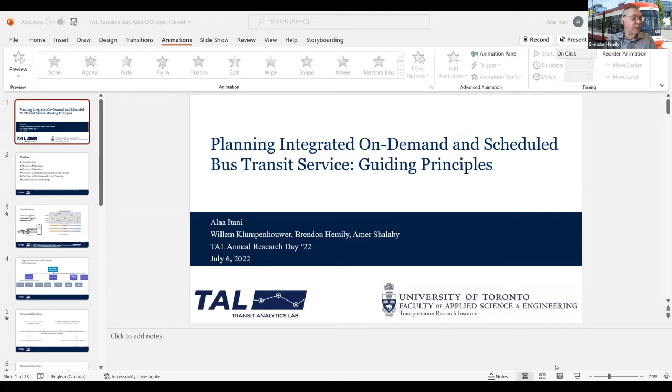And then we'll try to have a little time for questions after each, and start with that. Our first presenter, I'm gonna read them to get the titles exactly right. Alaa Itani is a PhD candidate in the Department of Civil and Mineral Engineering at the University of Toronto. In her PhD thesis, Alaa is developing guidelines and analytical tools to support on-demand transit planning, ODT planning. So Alaa, take it away.

Thank you, Brendon, for the introduction. Hello, everyone. Good morning. Happy to be presenting today as part of our Research Day. I will talk a bit more about the guiding principles that we've been trying to form the last year based on some synthesis from the research and practice.

Today's presentation is going to be a short presentation with some of our research motivation and objective behind constructing these guiding principles and how we did guiding principles for 2 different use cases. The first use case is at the transit network design, and then the second use case at the service planning level. And I will conclude with some of the limitations and future steps.

So really to begin with, maybe a lot of you already heard of what's on-demand transit. It's a flexible form of transit that can be served in different types of vehicles, but it also requires some sort of supporting technology to address the traveler's requests of drop-offs and pickups. And I like this definition from Volinski, that it's really the chameleon of the public transportation world because it's not one thing. Actually, on-demand transit comes with different forms. It can change its form in the middle of its cycle, and that's how flexible it is.

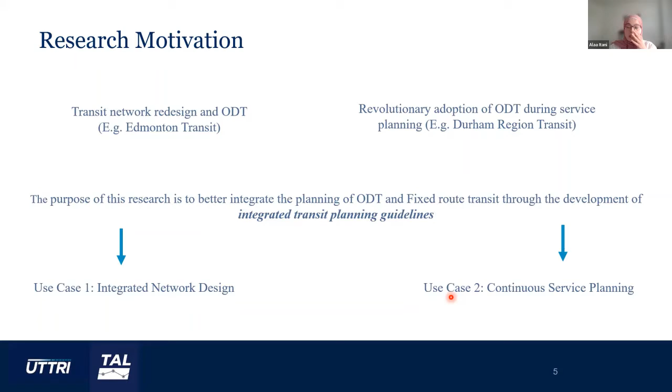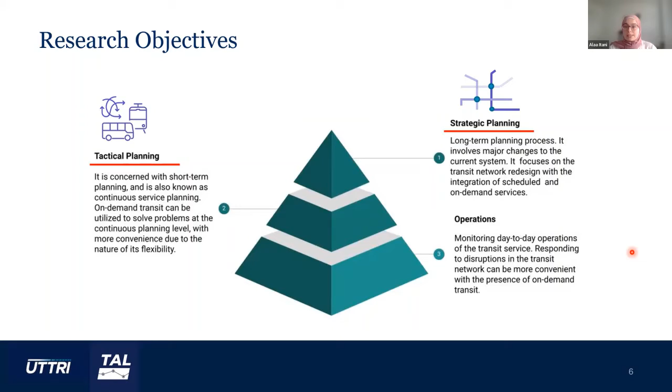So as I mentioned, we focus at the higher level, strategic planning level, the long-term level, and then we go into the tactical planning, which is the short-term planning process. And operations is out of scope of these guidelines. So just to begin with, to give you an overview of our first use case, we consider the conventional, if you want to say, transit network design flowchart, or planning that's usually done.

But we try at each of these steps to incorporate on-demand transit, like what are the new goals and objectives in an integrated network versus a fixed route or conventional network. What are the adequate performance metrics and criteria? What are the different system requirements, and how can we better help address equity with integrated networks?

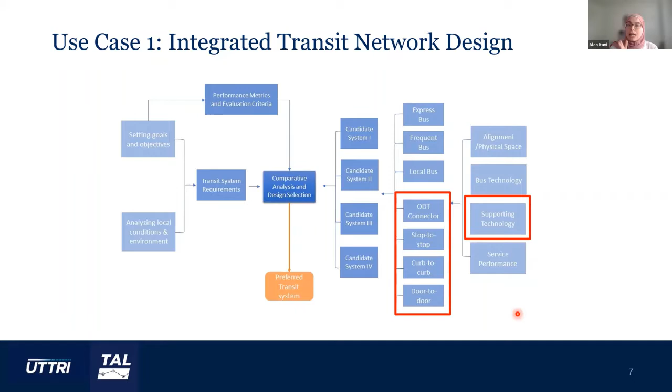And again, as I mentioned before, we introduce a new set of service configurations into the network, and we talk a bit about the supporting technology needed for on-demand transit. As part of our first use case, we try to introduce new opportunities for integration.

What we felt was most common in practice and research is the connection between on-demand transit and fixed route transit, where on-demand transit usually plays the role of first mile, last mile connection. But we try to highlight additional opportunities for integration.

The first one is service integration, which not only entails on-demand transit being the first mile, last mile connection, but also the ability in an integrated network to switch between on-demand and fixed route transit along the same corridor.

The second opportunity of integration we highlighted is fare integration, having free transfers between on-demand and fixed route transit and having the same payment method.

Secondly, trip planning integration, having people plan for their trips, knowing and connecting between fixed route and on-demand transit. And finally, financial integration, because in integrated networks it's really important to have cross-subsidies between less profitable and more profitable services. That could be done by having joint financial assessments rather than just assessing each individually.

Moving to our second use case, which is at the service planning level, here we focus on service-specific guidelines for on-demand transit. We start with what are the different service goals that on-demand transit achieves at the service level.

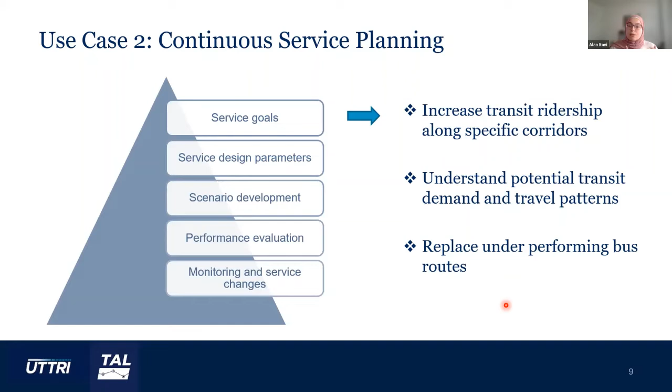So this is just a glimpse of a scenario development case where, let's say, a transit agency has potential to implement three different types of on-demand transit: the first mile, last mile connection, stop-to-stop configuration, or door-to-door configuration.

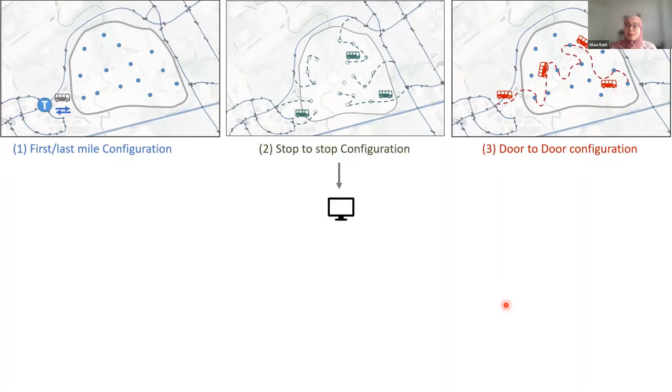There's really a need to have some analytical tools to be able to better assess which scenario best suits the goals of the company. That would be by measuring from the operator perspective, customer perspective, cost, time, but also, like we mentioned, performance evaluation measures.

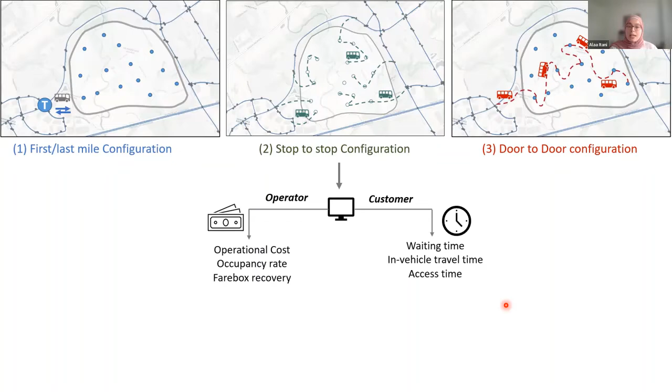Measures that also go beyond cost and time, like vehicle kilometers traveled, mode shift to transit, and increase in transit ridership. And equity, as I mentioned before, equity is very important with on-demand transit. It has been shown that it can fill gaps in transit networks, so having some equity analysis is important.

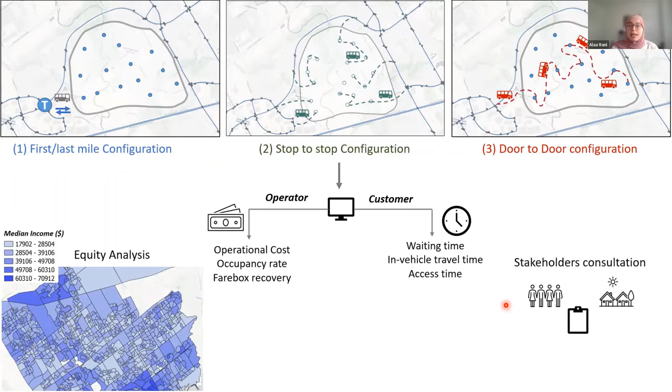And finally, the stakeholder consultation before the transit agency can really decide on what's the best plan in this specific service area for our goals that we need to achieve.

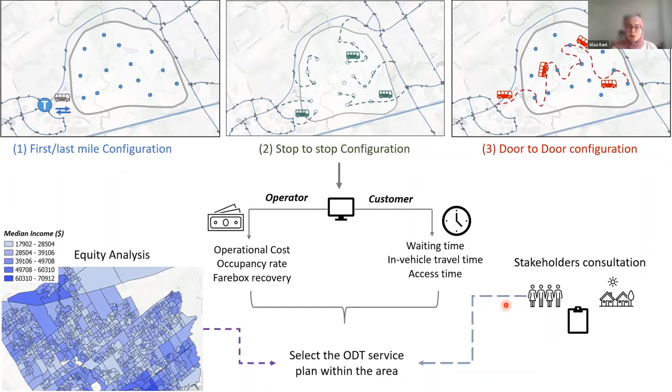So really to conclude here, these guiding principles really provide transit agencies with a lot of guidance on the opportunities of where to implement on-demand transit, the where, the when, under what conditions, and how.

They also help planners really formulate candidate plans of different on-demand transit services and highlight different opportunities for integration between on-demand and fixed-route transit. They provide guidance on the ways to evaluate those, where there are different competing plans. And finally, we discuss the associated issues of monitoring, data requirements, and service changes.

So the limitation of this work is that I mentioned simulation tools and their importance to evaluate on-demand transit services, but we do not cover which simulation tool is better or which to use. This is part of one of our future steps, to do a study on different simulations and their capabilities to model on-demand and fixed-route transit at the same time.

The second limitation here is that these guidelines do not focus on integrating on-demand transit with paratransit services or services for accessibility.

And finally, I mentioned equity, and we noticed that there is kind of a gap in the research with having adequate tools to measure accessibility, including on-demand transit. This is not part of our research, but it's an interesting research gap.

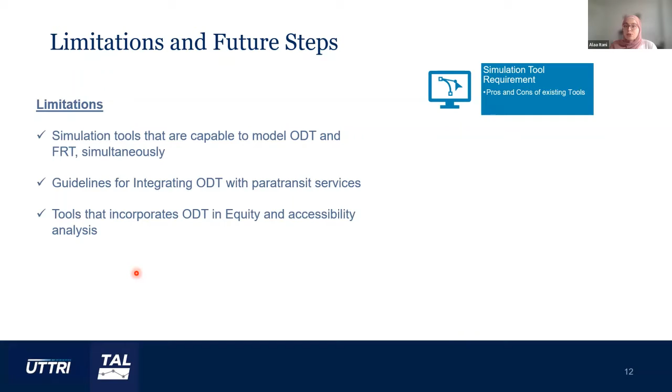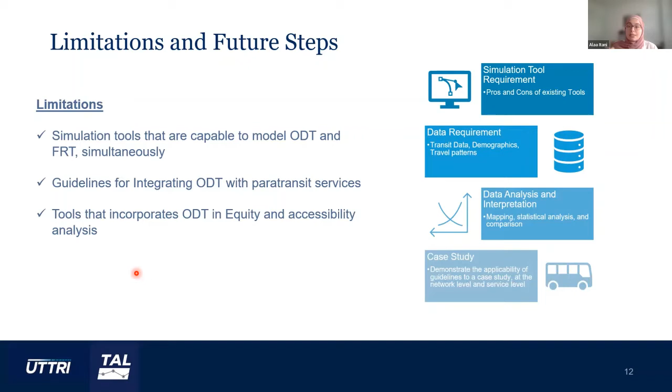And finally, our future steps, as I mentioned, are really to study the pros and cons of existing tools, collect data, and have some study on travel demand, patterns, demographics, existing transit networks, having a data analysis using some mapping, and finally demonstrate the applicability of these guiding principles in a real case study at the network level and at the service specific level.

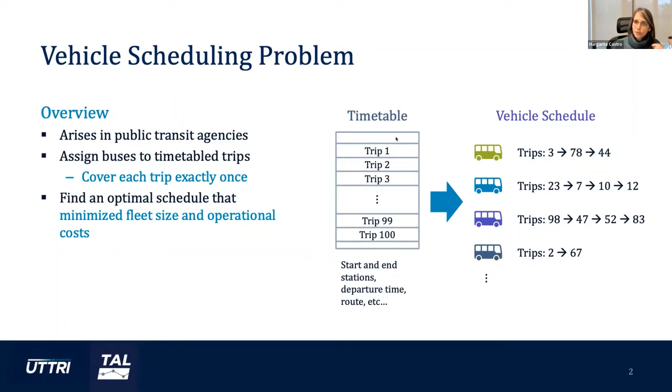So as before, the main goal is to assign each trip to exactly one bus. But the difficulty here is that now the bus has to start and end at the same depot, and this little change makes the problem exponentially harder to solve. And we also have to minimize the costs that basically are the travel times.

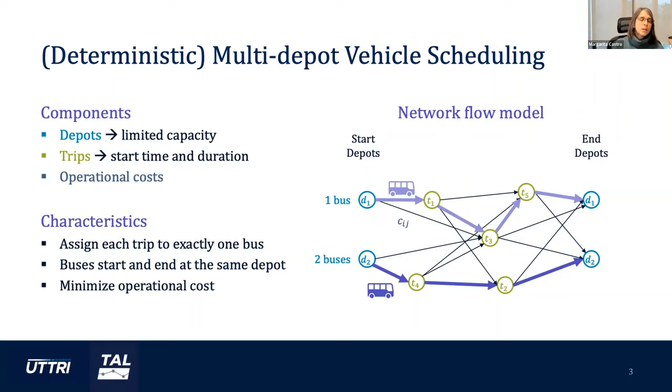So here I'm just talking about what we call the deterministic version that has a lot of limitations. Because when we talk about deterministic versions, we're usually talking about solving, considering the times as deterministic. So for instance, we can use average times to solve this problem, which would be optimal for these average times, but they are very inflexible. They don't consider the delays in practice. So we can have a lot of delays, and the schedule is not going to be that useful for the transit agency.

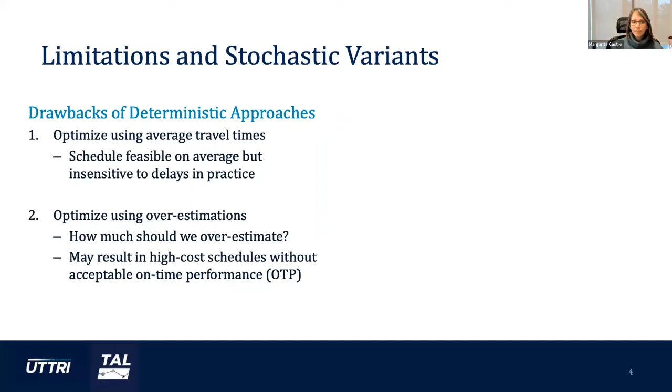Another thing that we can do, and this is actually very common in practice, is to optimize over estimation. So you consider not the average time, but you consider that there might be some delays. But the problem here is how much should we overestimate, and what happens in practice is that we tend to overestimate more than we should, and we end with high-cost schedules, but not necessarily with a very good on-time performance, because there's a lot of sensitivity going here.

So there have been some studies in the literature on how to incorporate the stochasticity, especially of the traveling times, to this type of problems. So for instance, you can consider the penalty on the expected delays, but this type of work usually doesn't consider the propagation of delay, that if one trip took longer, probably the next one is also going to take longer because of this propagation.

Also, there are some works that try to do some rescheduling or real-time vehicle scheduling, so they try to change the schedule during the operation, but these adjustments might be very infeasible in practice. They require a lot of coordination, so they're not very suitable for practical applications.

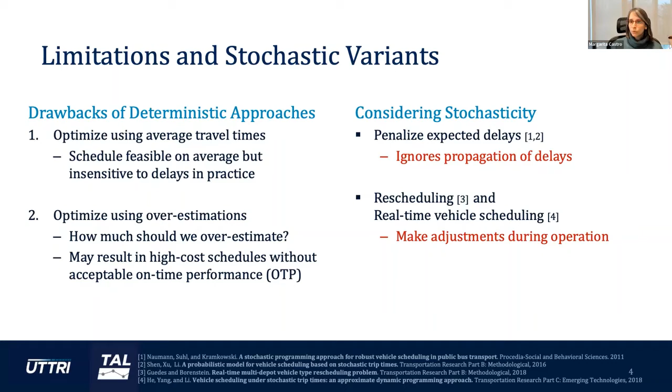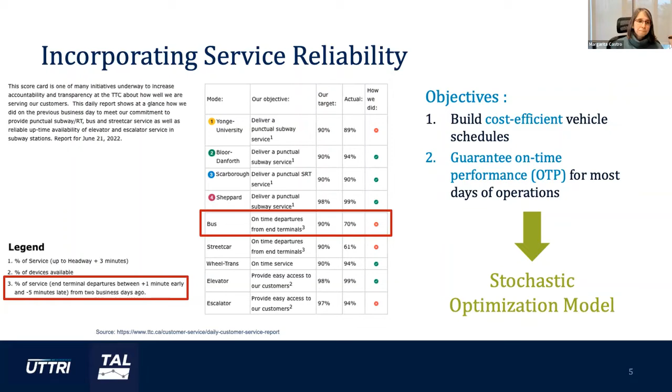So our main focus, with this in mind, was to build cost-efficient vehicle schedules, but also guarantee this on-time performance as defined here for most of the days of the operation. And to achieve this, we develop a stochastic optimization model. So the main key features of our model are the following.

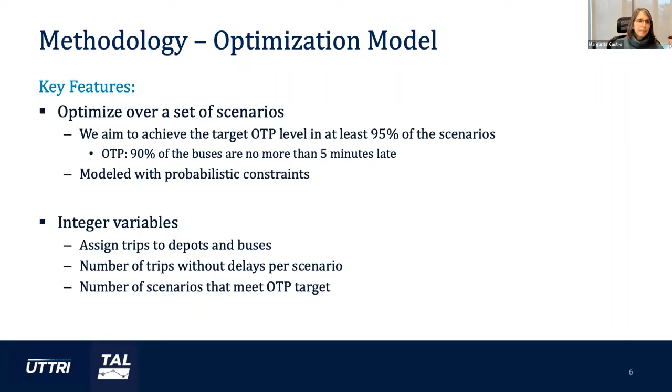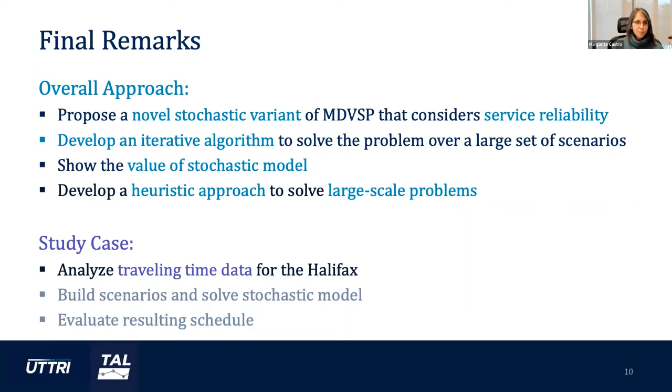So if you have any questions, I will be happy to answer. Thank you, Margarita. There actually is a question there from Eric. How do you translate deadhead travel times from HERE, measuring general traffic, to a bus travel time? Do you include variability in those deadhead times?

Okay, yeah, good question. Actually, this was very tricky because, of course, the data from HERE is mostly generic traffic, and it's not bus specific. So what we had to do is, if I recall, we added a little bit of variability there, but basically we used the HERE data as average time, and then we added a little bit more or less. I don't recall exactly, but we had to do a little bit of adjustment to make it more realistic. Yeah, that's true. But not too much.

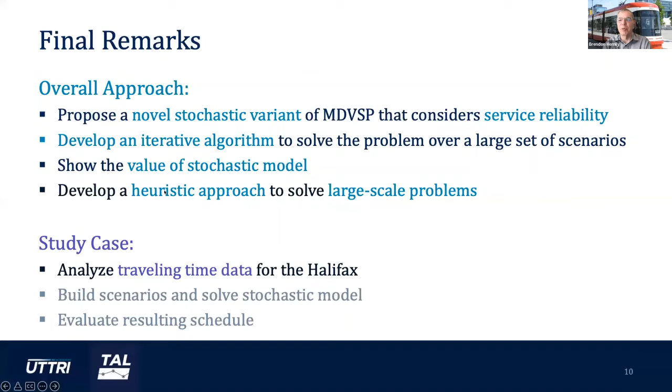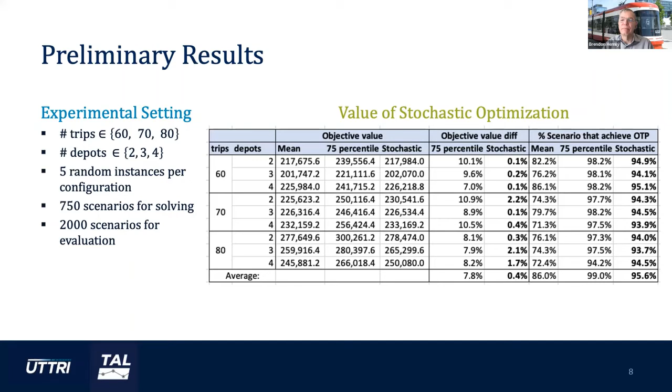Objective, the results, the objective value, basically the cost. But in practice, for this experiment, yes, the more depots that you have, the more variables that you have to incorporate to your model, so it takes much more time. In these particular problems, what we were seeing is that increasing the number of trips actually makes the problem much more challenging. I think we can reach up to 100 trips, but then it starts taking several hours to solve.

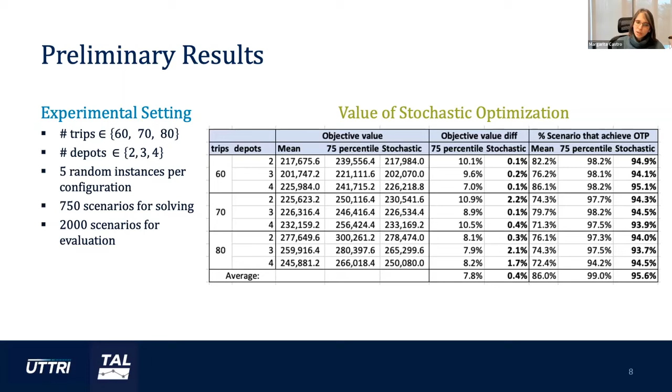The number of depots, since they're still very small, because in practice you never have more than, I don't know, 5 depots, it wasn't that much of a problem, but it's true. The more depots that you have, the harder it is to solve the problem. But still, for these ones we were able to find optimal solutions in 2 hours, so it was quite reasonable.

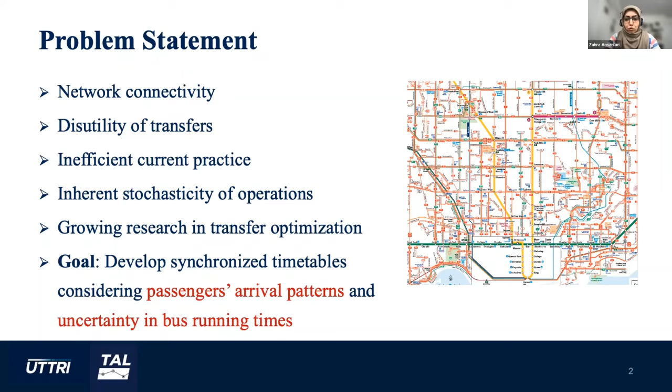A growing number of studies are tackling transfer synchronization, but mostly in a deterministic setting. And the few that consider the stochastic nature of transit systems are not including enough details in their model formulation. So to address this shortcoming, we are trying to develop synchronized timetables while considering the passenger arrival patterns, which I will explain shortly, plus the uncertainty in running times.

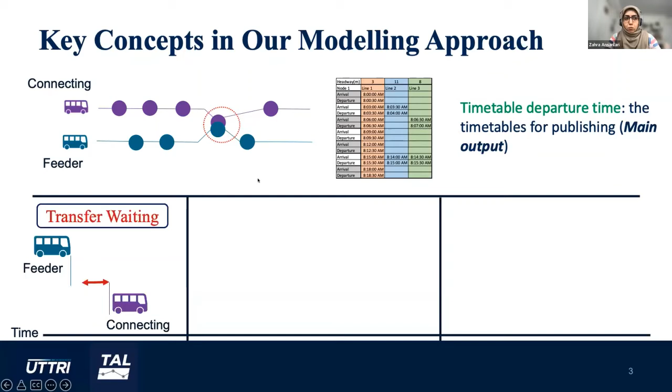So consider a transfer node, and we have one feeder line and one connecting line. The goal here is to develop a timetable for a departure time that we are going to publish for passengers. And we have 3 main objectives in our model. The first one is the transfer waiting time, which is the time that passengers from the feeder arrive at their bus stop and then wait until their connecting bus arrives.

But as I mentioned, we are considering the stochasticity of the running time. So the arrival time of the buses would not be similar across the different possible running times that would occur in the real world. So if the bus arrives early, and after its dwell time for boarding and alighting it has to wait until the timetable departure, we are adding some unnecessary in-vehicle time to passengers and also extra costs to this bus.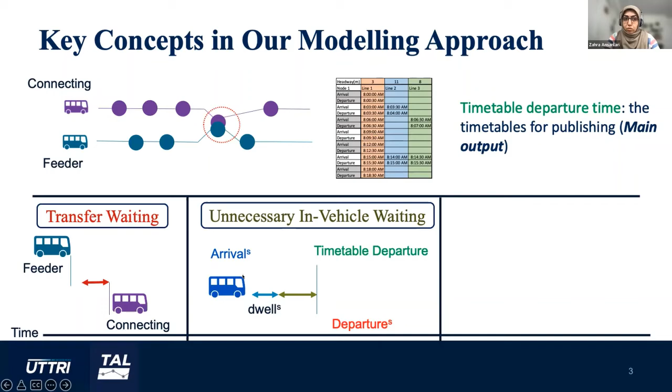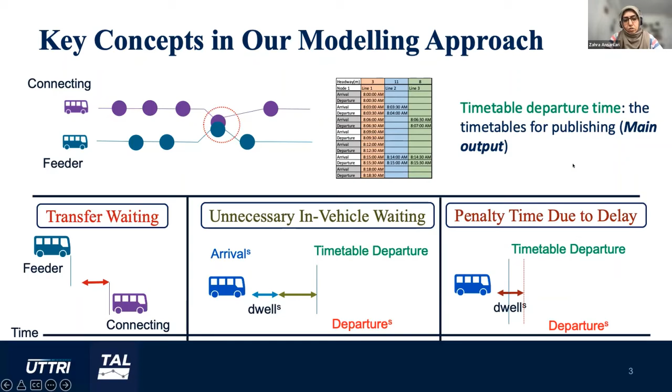Another scenario would be that the bus actually arrives very late. So after giving some time for the dwell time, it's going to depart later than the timetable departure time it's supposed to, which is the penalty time, and again, we are adding some extra time to the passengers. So the whole idea is to minimize these 3 types of waiting time in our system while considering the stochasticity.

So we have 2 main types of boarding passengers. One of them is the transferring passengers, for whom, based on the arrival of their feeder vehicle and the connecting vehicle, we will have the waiting time. However, for the local passengers, it's better to consider low frequency and high frequency lines differently, because in high frequency lines, the common assumption in the literature is that passengers will just arrive randomly. So the number of local passengers that we will have in our system.

I forgot to mention that we are determining the exact dwell time for our buses to make sure that we also have the correct departure time. So in order to determine that dwell time, we need to know the number of passengers and also their relative arrival time to the bus.

So in high frequency, the local passengers are coming. We define two zones to correctly model this dwell time and the arrival time for the high frequency. So in zone 1, if the bus arrives before its timetable departure time, we will have the local passengers, which is the number of passengers who arrived during the interval between the previous bus departure time and the arrival time of our bus.

And then we will have some transferring passengers. We determine their dwell time and see whether we have any unnecessary in-vehicle time, or whether their required dwell time passes our departure time, and we consider the penalty.

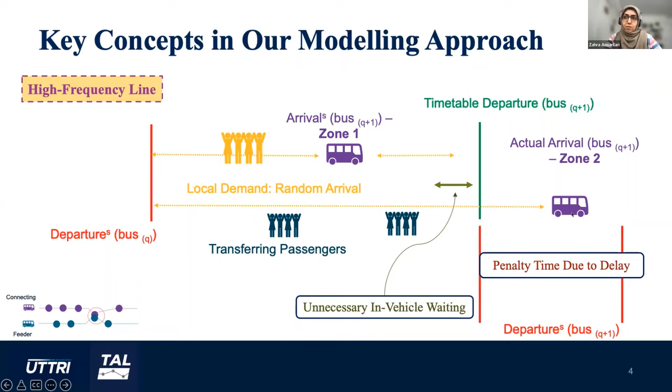The second case is that the bus arrived very late after its timetable departure time. So now we have more local passengers. We determine that value correctly, and then we will also have some transferring passengers. Again, we determine the dwell time and the departure time of this vehicle. In this case, for sure, we have some penalty.

But the model gets more complex when we are talking about the low frequency line, because the common assumption is that passengers tend to check timetables when their bus is low frequency and try to minimize their waiting time accordingly. So we will have a skewed distribution for passenger arrival, and we assume that based on some data, we can find the time that the higher proportion of passengers arrive, for example, this time point.

And there is also a smaller group of passengers who tend to come close to the timetable departure time. So in order to consider all of these arrival patterns and the correct dwell time, we define 4 zones for low frequency. The first zone is that our bus arrived very early compared to the timetable departure time, which means we will not have any local passengers, but it's possible that we have some transferring passengers.

The second zone is that the bus arrived at this time interval where we have our first local passengers, so we consider their dwell time plus any possible transferring passengers who arrive during this time. And the third zone is when the bus arrives very close to the timetable departure time, where it's possible that we will experience some penalty time if we have a lot of local passengers and also transferring passengers.

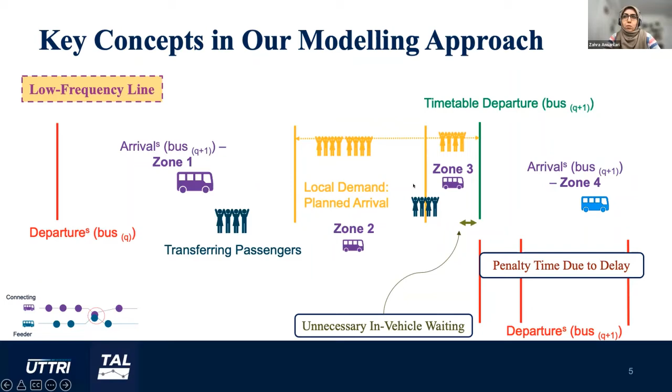And the fourth case is that the bus arrived later than its timetable departure. So we will definitely have some penalty time. So on the whole, we are trying to minimize all these possible waiting times that would happen in our system.

In order to formulate this super complex model, we formulate the model through 2-stage stochastic mixed integer programming. The first stage is the timetable departure times, which are going to be fixed. So we are fixing that timetable. We are going to publish that timetable.

But the second stage is the possible arrival and departure times that would happen in our system, which we define as scenario-based. So based on the distribution that we have for our running times, both feeder and connecting vehicles, we create some scenarios, and the arrival and departure times of those scenarios are the second stage decision. For example, whether the bus has to wait until its published departure time, whether the bus is departing late or on time.

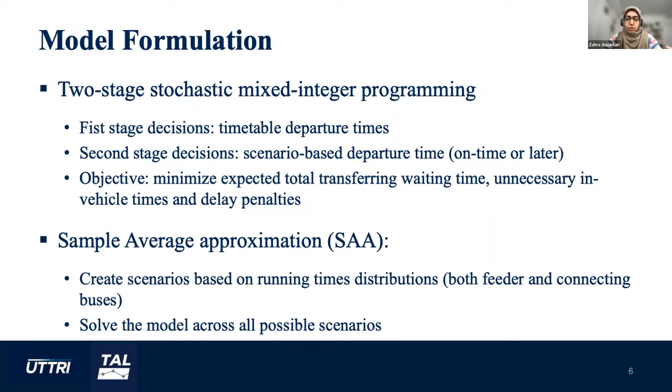And then the objective is to minimize the expected total transfer waiting time, unnecessary in-vehicle time, and the delay penalties across all the possible scenarios. So we are solving our stochastic model through the sample average approximation method, meaning that we create those scenarios based on the running time distribution, and then we solve the model in a way that we develop a timetable that, when applied in those scenarios, gives the minimum expected value.

So we run our model for one transfer node, which has both a high and a low frequency line. The high frequency is about 3 minutes headway, and the low frequency is 17 minutes. And we run that model for 10 scenarios.

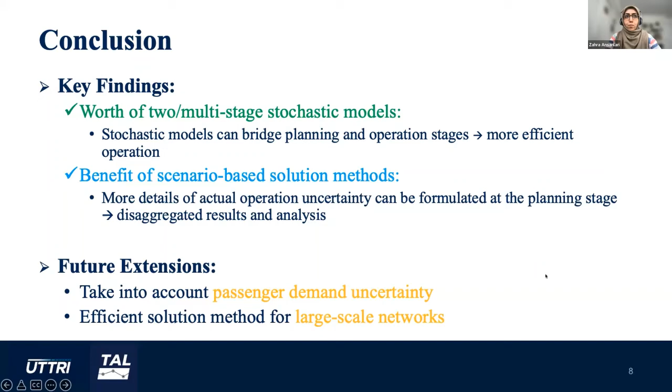Thank you, Zahra. That was very interesting.

You talked about complexity. The test for your simulation was one transfer point, correct? So what happens in a grid where there's multiplicity — is it scalable, or what happens? There are a couple of approaches we can use to create a solution method to solve a stochastic model that we are currently working on. The idea is that you break down the whole model to each transfer node, solve them separately, which is faster, and then merge them together to get the final solution. It's doable, but it needs some research to do that. And probably pretty powerful computers.

Could you clarify the 10 scenarios — are there variations in the arrival times of the different vehicles or buses? The variation here is that the running times between each terminal and the transfer node — we only have one transfer node, but we create different scenarios based on different running times for both the feeder and the connecting vehicle. When we run those models for different scenarios, the arrival and departure times would be different in each scenario because of the running time. For example, all buses will depart from the terminal at the same time, but because of different running times, their arrival time at the next node is different. Then we see whether it can actually depart on time or will depart later, and we see stochasticity in arrival and departure time in the following nodes.

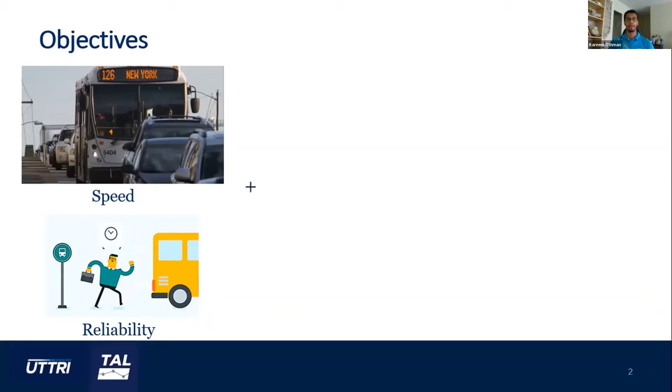Most transit studies focus on improving transit speed or reliability. In this research, we focus on these two aspects, improving transit speed and improving reliability. In addition, we are trying to minimize bus energy consumption, and also improve passenger comfort. So it's a combination of objectives: we are trying to achieve improvement in speed, reliability, energy consumption, and level of comfort.

Traditionally, if you want to really improve or prioritize transit, this happens at the cost of traffic. You implement exclusive bus lanes or TSP, improving transit at the cost of delaying or deteriorating traffic performance. In this research, we are trying to prioritize transit, but at the same time looking at traffic, trying to mitigate the impact of this prioritization on general traffic.

In this research, we will be talking about three main strategies: dynamic bus lanes, speed advisory systems, and some advanced TSP. For the aim of this presentation, I will focus on dynamic bus lanes and speed advisory systems only. I will start by investigating every strategy individually, then I will combine these different strategies at the end of the presentation.

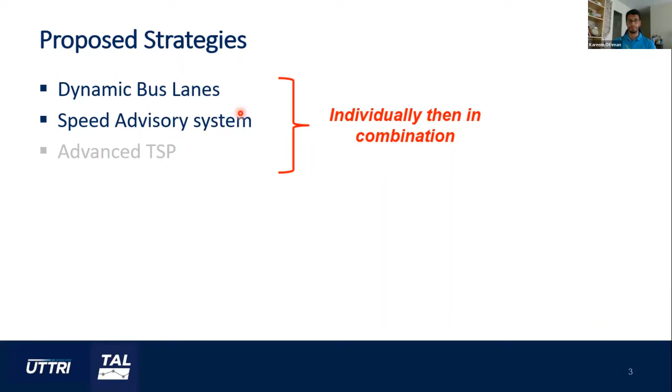So let's start with the first strategy: dynamic bus lanes. These are lanes that are accessible to cars when a bus is not present. We have a bus here, and a clear distance ahead of the bus. In this clear distance, general traffic is not allowed to enter the lane. But ahead of this clear distance, and behind the bus, general traffic is allowed to enter the lane. So it's giving priority to transit within a specific distance, called the clear distance.

This is mainly based on connected vehicles. We need some sort of communication between the bus and general traffic to inform traffic not to use this lane. It's very similar to emergency vehicles such as ambulances. In this case, we'll have a win-win situation: a lane that gives priority to transit, and at the same time, once we don't have a bus in the lane, general traffic will be allowed to use it. We are prioritizing transit while allowing general traffic to use this lane when no bus is running.

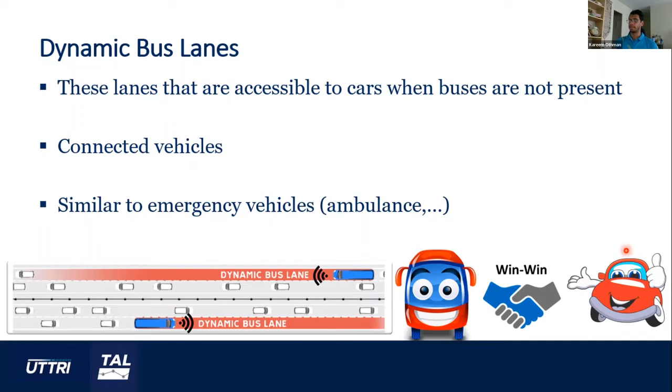In order to test these dynamic bus lanes, we've seen that the TTC in 2019 approved their 5-year plan, giving priority to 5 main corridors. They implemented exclusive bus lanes in Eglinton East, which is now running with exclusive bus lanes. So we decided to build a simulation model for Eglinton East to compare the performance of exclusive bus lanes with dynamic bus lanes, and with the case of doing nothing.

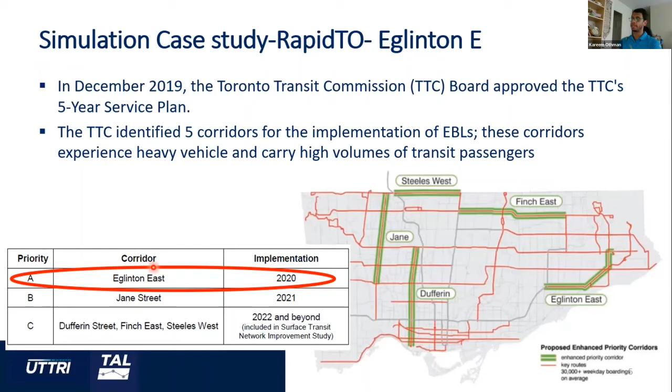As I mentioned, dynamic bus lanes aren't only going to affect transit—they affect transit and traffic. So the main focus here is on total person travel time, not just for transit. For every scenario—exclusive bus lanes, no priority, and dynamic bus lanes—we tested every strategy under different demand levels and different frequency levels.

We have 2 figures here. Figure A compares the total person travel time for exclusive bus lanes versus no priority. Figure B compares dynamic bus lanes versus no priority. On the x-axis we have total traffic input flow, and on the y-axis we have bus frequency. The red color means our strategy—exclusive or dynamic bus lanes—is deteriorating total person travel time, while blue shows the strategy is improving total person travel time.

For exclusive bus lanes compared to the case of no priority, we see an area here under heavy traffic demand and high transit frequency.

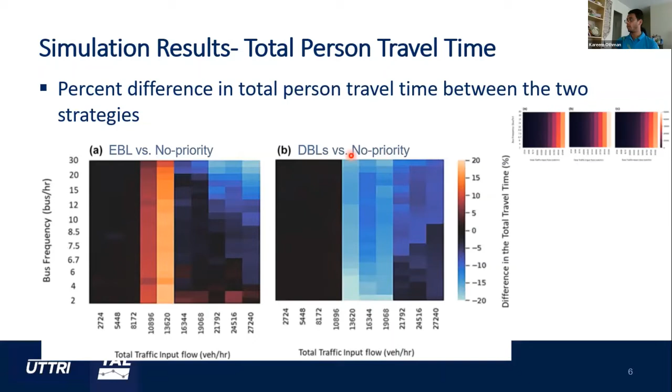We have an area here where exclusive bus lanes are actually a good option, improving or reducing the total person travel time. And the same figure is shown for dynamic bus lanes for the case of no priority, but we can see there is a big area here where actually dynamic bus lanes are beneficial.

Based on this comparison, we have reached this final figure that shows the optimum strategy under every condition. At low traffic demand, we don't really need to give any priority to transit. At high traffic demand with low transit frequency, we don't really need to give any priority either. We have a large area where dynamic bus lanes will be an optimum strategy that achieves the minimum total person travel time. And the exclusive bus lane is the optimum scenario for high traffic demand and high transit frequency.

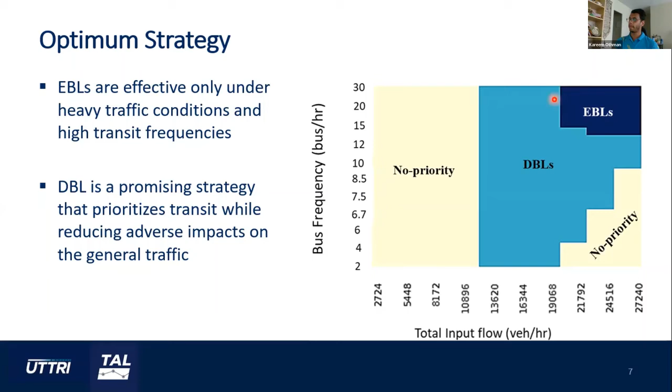Now I'll switch to the second strategy, which is the speed advisory system. The main objective of the speed advisory system is to allow the bus to arrive at the intersection while the signal is green. So what happens is that we have a signal.

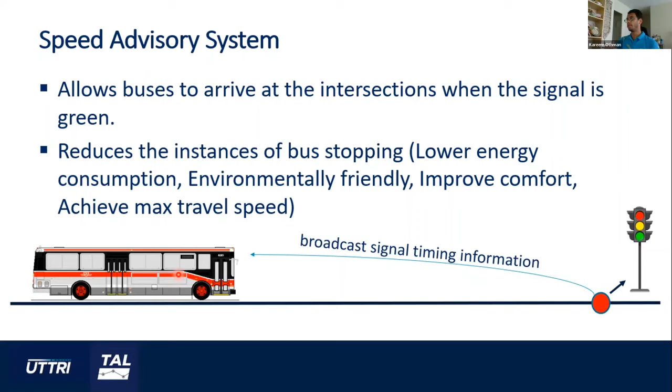This signal will be sending the bus the signal timing information, so the bus will be aware of what's happening in the signal ahead, and will be adjusting the bus's speed in a way that allows it to pass the intersection without stopping, at the green phase.

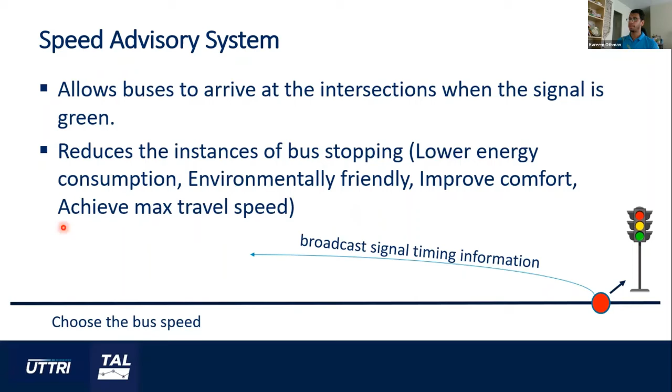So why are we doing this, or what are the benefits of this speed advisory system? It actually reduces the number of stops, which in turn reduces energy consumption, improves the level of comfort, and at the same time achieves the maximum travel speed, as I will show in the next time-space diagram.

This diagram shows how the speed advisory system works. If we have two segments, at the beginning of segment 1 we do the calculation given the signal timing information at signal 1. We have the maximum speed and the minimum speed. We iterate from the maximum speed, and keep iterating until we reach a specific speed that allows the bus to arrive at the green phase.

But in the case of no priority or no speed advisory, the driver will be traveling at a random speed, arriving at a random time, and might stop at the red phase. So here, if you give some advisory to the driver, you let him drive at the maximum speed to arrive at the green phase.

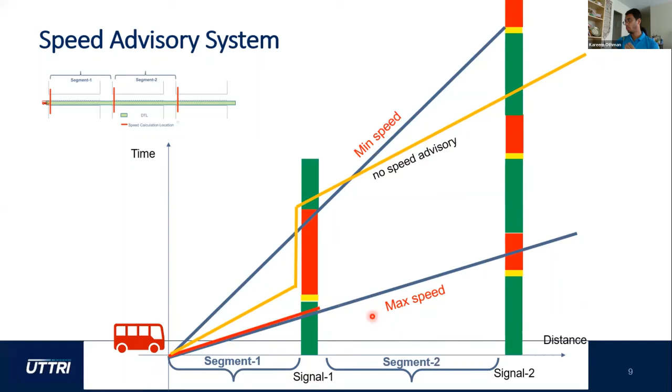For segment 2, we do the same calculations, but the maximum speed is actually hitting the red phase, so we keep iterating until we reach the speed that allows the bus to arrive at the green phase. This is going to be the speed advised to the bus driver, and this way we are avoiding the stop at the intersection.

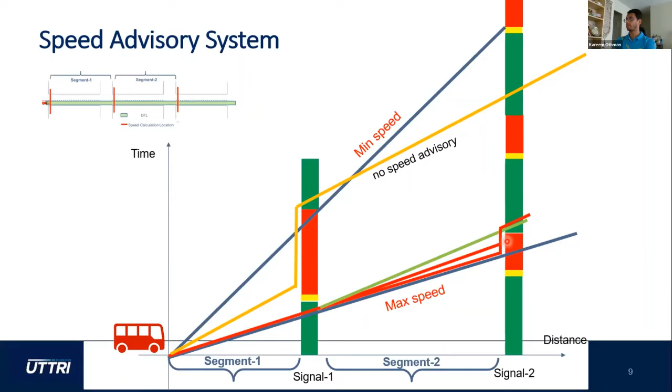So what happens if we have a dwell time? In the previous case, I didn't show any bus stop. In this slide, I'll show how the calculation works once we have a bus stop, so it's going to be not only speed advisory, but speed plus dwell time advisory.

In this case, we have the maximum speed and the minimum speed. For the maximum speed, if we choose it, the bus will be dwelling for a specific time, then traveling again, but in this case the bus will be forced to stop at the intersection. And if we choose the minimum speed, the bus will also be forced to stop at the intersection.

So any speed between the maximum and the minimum speed will end up with a bus that has to stop at the intersection. So here we don't just give a speed advisory, but also a dwell time advisory. We advise the driver to dwell for additional time, to allow the bus to arrive at the intersection or signal at the green phase.

So we have two terms here: we have the standard dwell time.

This is the dwell time needed for boarding and alighting, and we are advising the driver to dwell for some additional time to avoid stopping at the intersection. And again, this strategy has been tested on Eglinton East, the same corridor we have tested dynamic bus lanes, and we will be showing the results.

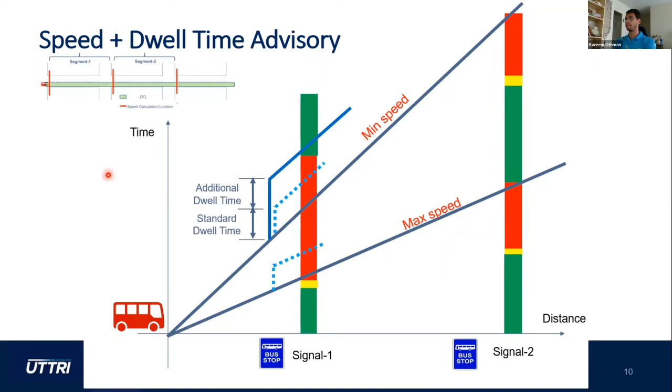Let's start with the average bus speed, and we have the case of exclusive bus lanes and the case of dynamic bus lanes. So in order to test this strategy, we need some sort of prioritization to make sure that the advised speed is actually achievable in real life. So we are implementing this strategy in combination with either exclusive bus lanes or dynamic bus lanes. So in this case, we have the two scenarios, exclusive bus lanes and dynamic bus lanes, and under every condition we have the maximum speed.

So the first one is a scenario where the bus driver will be traveling at the maximum speed at every time, and we have S, which is the speed and the dwell time advisory. So for the case of exclusive bus lanes, we will see that the average bus speed is not really different between the two scenarios, and for the case of dynamic bus lanes, there is also no major change in the average bus speed. But in terms of the stop density, which is the number of stops per kilometer, we will see a significant reduction in the stop density between the case of just traveling at the maximum speed and the case of speed and dwell time advisory.

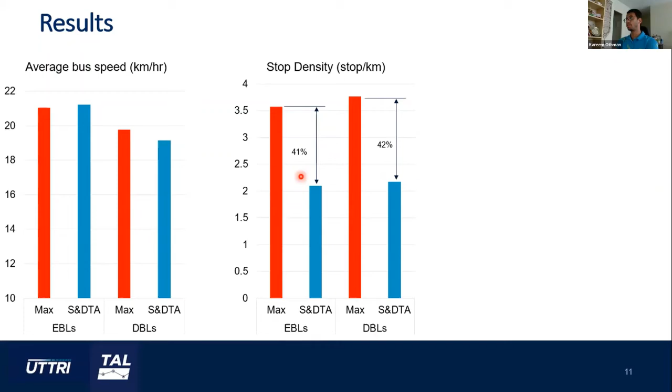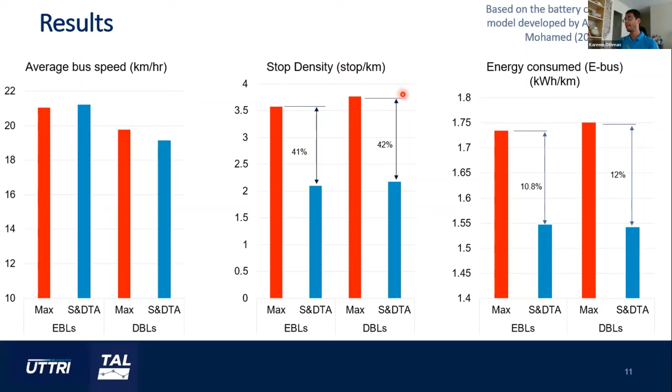Around 40% reduction in the two cases, exclusive bus lanes and dynamic bus lanes, more than 40% reduction in the stop density. And in turn, we will see a huge energy savings, between 11 to 12% reduction in the energy consumption. And this is based on the model by Abdelaty and Mohamed 2022. So what happens here is that we are achieving a speed that's actually very similar to the maximum traveling speed, but with lower stop density and with significantly lower energy consumption.

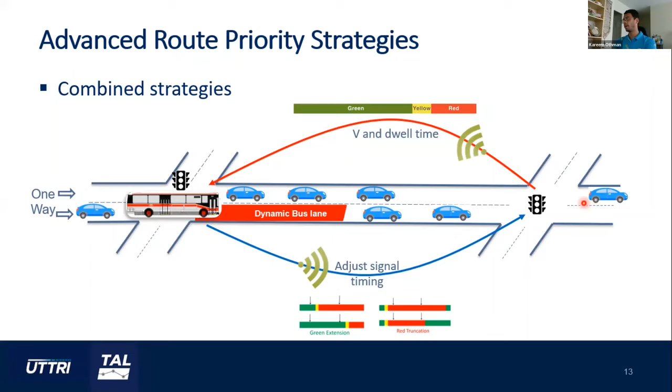So what's happening is that we will be giving transit priority at the dynamic bus lane, and the bus will be communicating with the signal to adjust the signal timing information. We have green extension and red truncation, and based on this adjustment, the signal will be communicating with the bus, giving it the new signal timing information to adjust the bus speed in a way that allows the bus to arrive at the green phase. And for the future, we are trying to develop multi-agent reinforcement learning for each of these three strategies individually, and then we'll be combining them into a multi-agent reinforcement learning model.

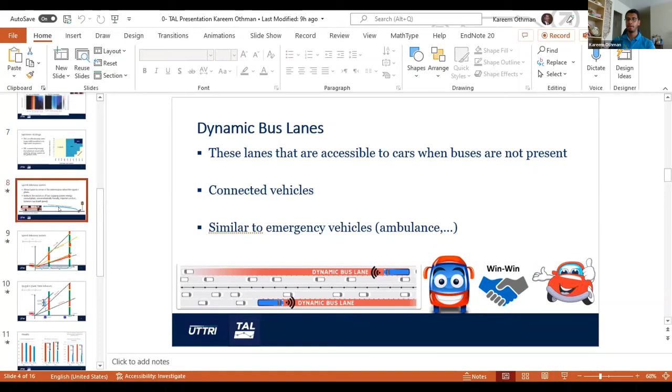And the speed advisory system is mainly for transit. It doesn't really need connectivity, just some sort of connection between the signal and the driver. You can have an application or a screen for the driver telling him to travel at this specific speed, just advising the bus driver. So you don't really need any kind of traffic compliance.

Right, and the holding could be done through the AVL system as well. But there's a practical problem: if the bus pulls over for 30 to 50 seconds, drivers behind in cars would be a little annoyed. Yeah, that's true. And in the other case, there's the issue of merging, because with an emergency vehicle everybody just pulls over and stops, but this would involve merging back and forth. But it would improve capacity for general traffic as well as improve transit. So it's an interesting approach.

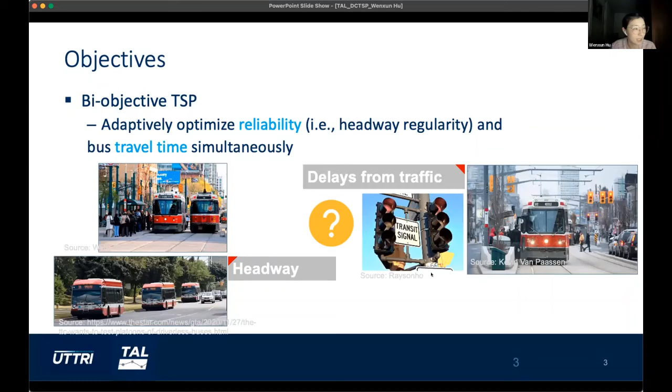Improving headway regularity and reducing transit delays are both important. Uneven headways: long headways result in crowdedness at bus stops, and short headways lead to bunching. Passengers on bus lines with irregular headways experience excessive waiting time, which is out-of-vehicle travel time. In-vehicle travel time increases with transit delays, a great portion of which can be attributed to traffic lights. Therefore, we want a strategy that adaptively improves both headway regularity and travel time, not only at individual intersections, but in a coordinated fashion so that improvement gained upstream is not wasted at downstream intersections.

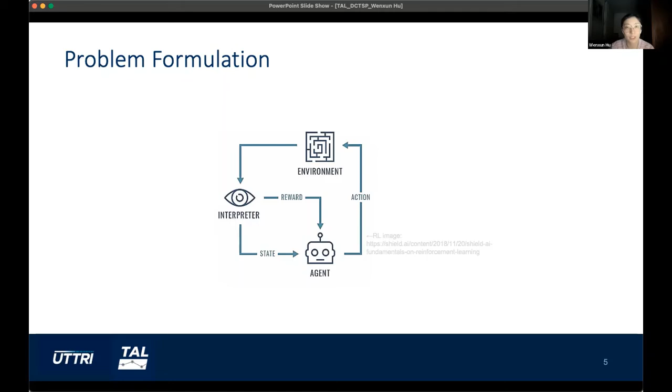Reinforcement learning is a subfield of machine learning that teaches an agent how to choose an action from its action space within a particular environment in order to maximize rewards over time. Reinforcement learning has 4 essential elements. The first one is the environment, which is the world, real or virtual, in which the agent performs actions. In our case, it is the transportation network, simulated using AIMSUN. It includes the 2 intersections used for the case study.

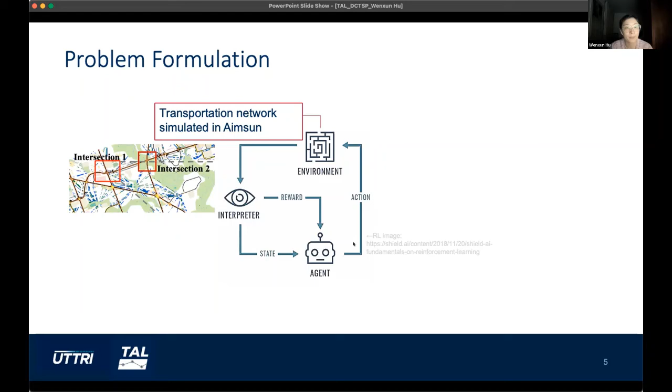The second element is agent, which is the program we train with the aim of doing the job we specify. In our case, the agent is the TSP control system, which interprets the environment state, including information related to bus headways, number of cars, and signal timing. The agent also receives the reward feedback from the environment after an action is taken.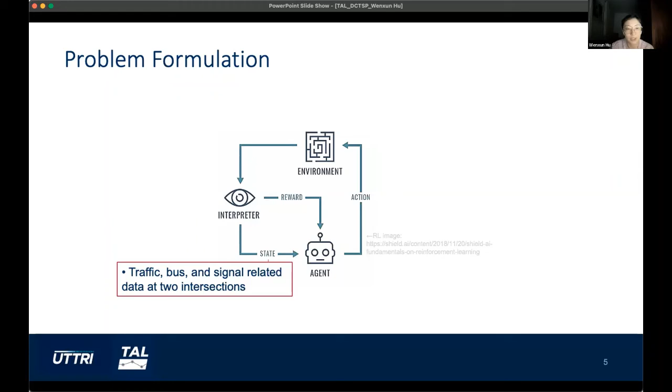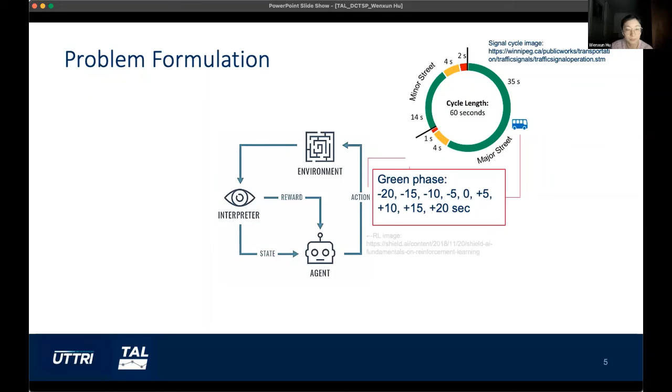The third element is action, which is a move made by the agent, which causes a status change in the environment. We adjusted the duration of green phases at 2 intersections for buses using truncations up to 20, 15, 10, and 5 seconds, do nothing, and green extension up to 5, 10, 15, and 20 seconds. The last element is reward, which evaluates the performance of an action. In our case, the reward consists of evaluations on the headway improvement and travel time at 2 intersections.

In general, using reinforcement learning, the traffic signal control system collects information on the states of the environment, takes actions, and learns the quality of different actions via the feedback signals provided by the environment.

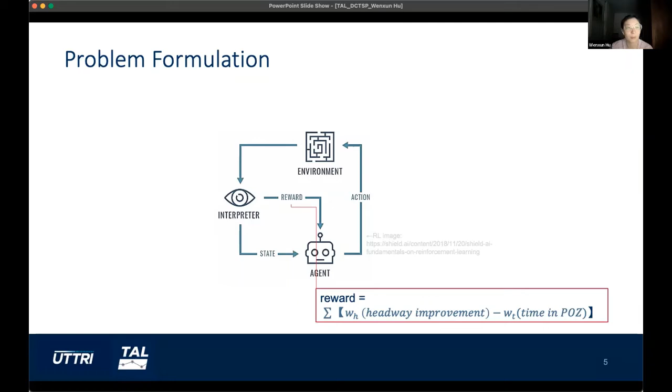The proposed coordinated TSP algorithm is trained and tested in a carefully calibrated micro-simulation model using AIMSUN Next, which simulated a subnetwork in the city of Toronto. The bus route 36 Finch West, operating on the east-west corridor, experiences high service variability.

We collect field data on traffic demand during AM peak and automated vehicle location data from TTC to calibrate traffic and transit performance. All signals along the corridor are simulated based on signal timing cards provided by the City of Toronto. We trained and tested our coordinated TSP at 2 successive intersections to see if the performance of this bus line is improved.

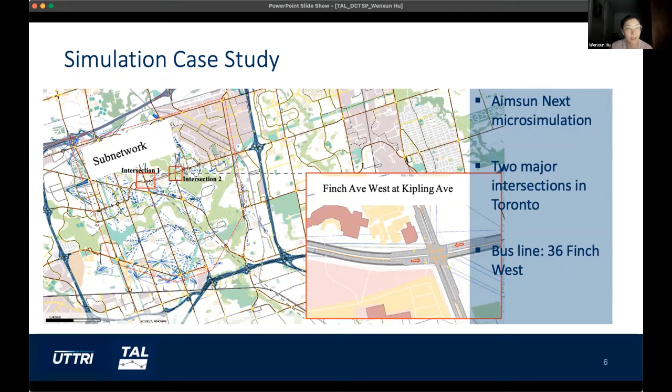The performance of the proposed coordinated TSP is compared with 4 baseline scenarios. The proposed TSP is called DC TSP. That is the dual objective coordinated TSP. So the baseline scenarios are: the first scenario is the no TSP scenario that uses a fixed signal timing plan currently serving the selected intersection without TSP.

The second scenario is Toronto TSP, which uses the TSP algorithm currently implemented in the field, enabled at both intersections. The third baseline scenario is IQL TSP version 1. The IQL TSP uses the independent Q-learning approach, which contains 2 different reinforcement learning agents that were trained independently at individual intersections.

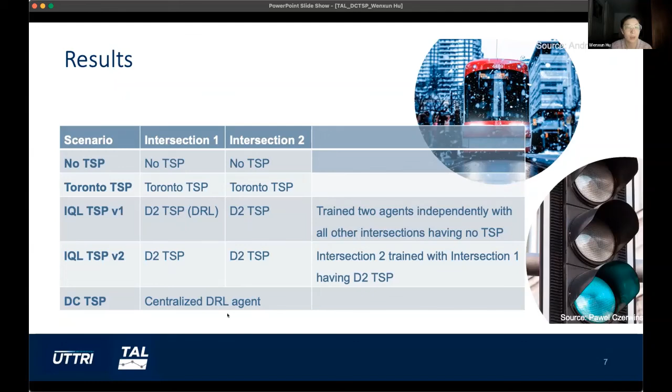Version 1 of IQL had agents trained with all other intersections having no TSP, while version 2 had intersection 2 trained with intersection 1 having the deep reinforcement learning TSP that was developed previously at single intersection level. All the baseline scenarios are compared with the proposed DC TSP, which contains a centralized deep reinforcement learning agent that optimizes signals at 2 intersections simultaneously.

We'll first take a look at the reliability performance. We used coefficient of variation of headway as the measure of reliability, which represents headway adherence. Lower values indicate better reliability performance. This figure shows the coefficient of variation measured at the check-in loop of intersection 1, the check-out loop at intersection 1, and the check-out loop at intersection 2.

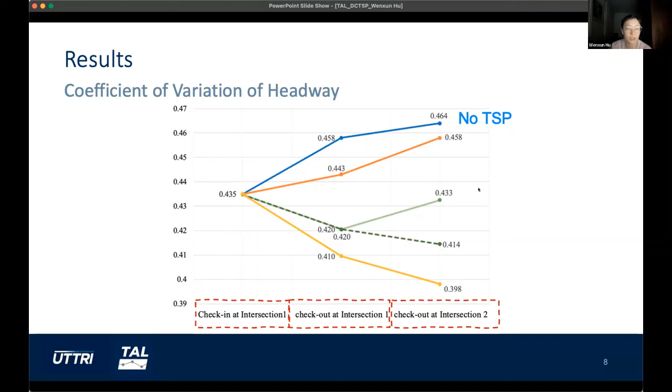Ideally, we want to observe that the coefficient of variation keeps decreasing. However, the coefficient of no TSP increases, as well as Toronto TSP. This is because these 2 scenarios do not aim at improving reliability at all. IQL TSP version 1 improves headway adherence at intersection 1, but not at intersection 2. This is because the agent trained independently for intersection 2 does not learn how to improve headway with intersection 1 having TSP.

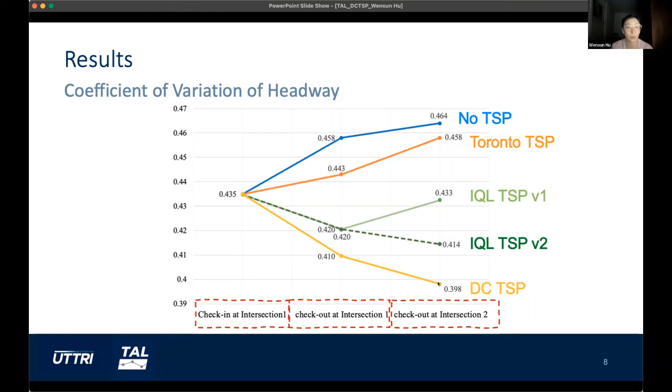The second version of IQL TSP, in which the agent at intersection 2 was trained with intersection 1 having a deep reinforcement learning TSP, learned how to improve headway adherence at intersection 2. The proposed DC TSP improved the coefficient of variation from the very beginning when buses check in at intersection 1 until they check out at intersection 2. It has the best reliability performance.

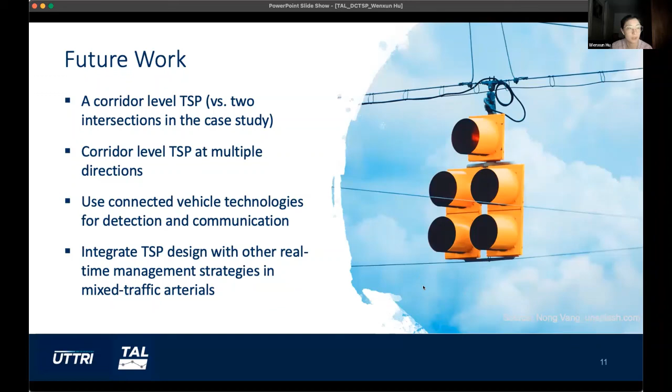The DC TSP only optimizes bus service in one direction. Future research can consider optimization of service in multiple directions. When the loop detectors used in this study are not able to provide continuous data, this limitation can be overcome by applying connected vehicle technologies, which would support more informative decision-making. Okay, the DCTSP demonstrated the best performance relative to other TSP strategies, but when traffic volumes get high, the performance of this advanced TSP deteriorates, and thus we need supplementary strategies like dynamic transit lanes and speed advisory systems like Kareem just presented. Okay, that is the end of my presentation.

Thank you. Thank you very much, Wenxun. That was very interesting. I really liked how the scenarios and the results from the scenarios were exactly what you would expect given how the different strategies are deployed. It's also interesting because I'm not sure many people realize, but the unconditional priority that Toronto has is very unique. The vast majority of more recent transit system TSPs, traffic engineers usually insist on having a conditional priority.

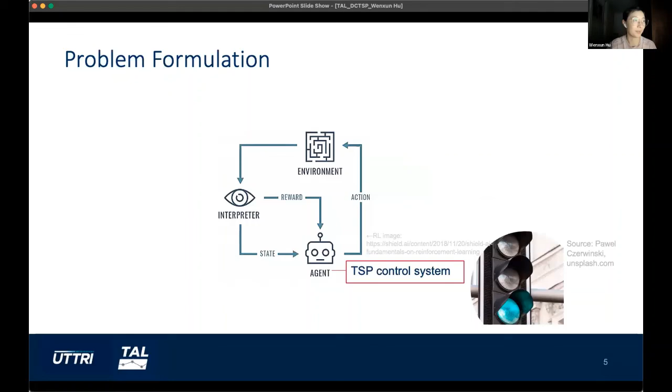So in practice, to put this in place, would this require a centralized TSP, as opposed to a lot of them that are just intersection based and sort of keep a corridor through their predefined plans? This sounds like it would have to be a pretty real-time dynamic process. Would it require a centralized control system? Yeah, I think this requires a centralized control system. Just like in the very beginning of the formulation page, there's a centralized control agent that controls multiple intersections at the same time. All the state information is provided to the centralized agent for it to optimize the control strategies.

And the learning is a continuous process? Yes. Usually using deep reinforcement learning we would perform offline training first, and then it learns kind of the optimal policy offline. And when implemented in the field, we can turn on the online learning as well. So it learns based on the offline training results and keeps learning any new situations that may occur and were not captured in the simulation. That's great.